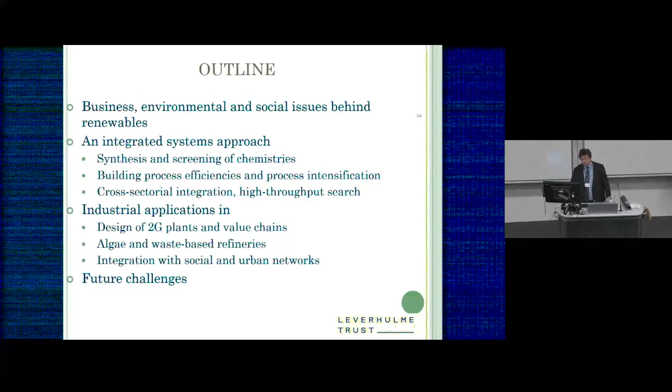I will touch on the major drivers of renewables and biorenewables, and try to explain why a systems or integrated approach is important. I use lots of mathematical methods, modeling, and optimization, but during this presentation I will try to ground that through actual applications and problems. I will naturally finish with my views on future directions in this area.

So whether the war in Ukraine will continue, whether we find new reserves for oil and gas, whether the price of oil goes up or down, we need to keep the planet alive, have a more balanced portfolio of resources, and apparently increased uptake of renewables.

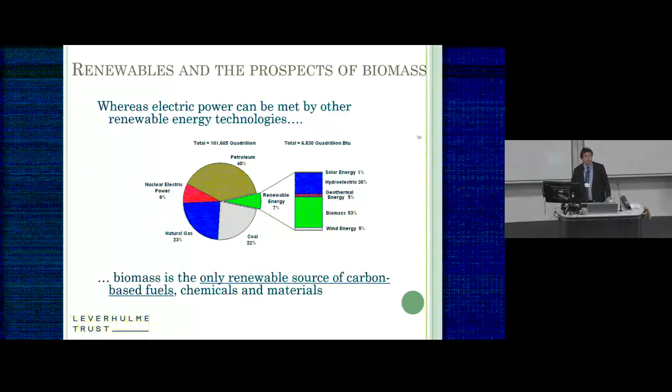And out of the renewables, the largest portion, also historically, is biomass. More than 50% of the renewables are based on biomass. And biomass is the only carbon-based renewable that we have.

Biorenewables have a first round of developments with first-generation plants. These were based on simple chemistries, single products, easy kind of chemistries. We have several plants - green plants, profitable plants - still that are unsustainable as they compete with food.

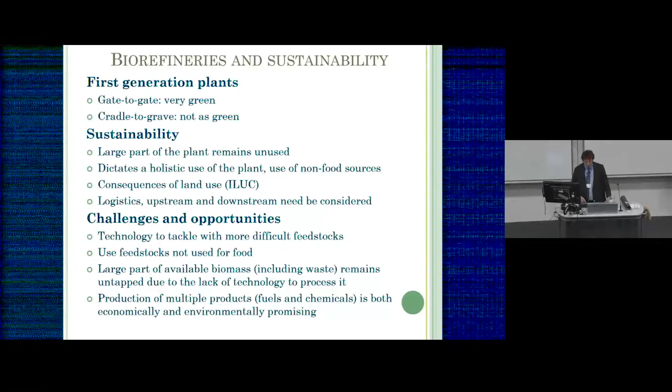They are more with gate-to-gate efficiency rather than cradle-to-grave type of efficiency. So the future would be on the more difficult type of biomass, which involves more difficult and complex reactions, which involves a full and not such wasteful utilization of resources. So the chemistries are quite complex in this case. You can get a feeling of what it is there.

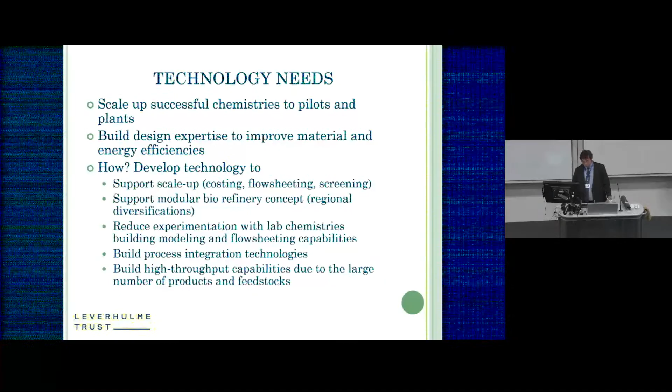And what this kind of technology will need from us? Apparently, we need to make sure that they're sustainable, we can scale them up, and we can connect them with sustainable portfolio of other chemicals to survive. And what is the role of chemical engineering or process engineering?

Apparently, chemical engineering holds the knowledge, and also, if you wish, the historical expertise of the conventional refinery. Conventional refineries also started with very simple, actually, with no chemistries, and they developed into complex kinds of systems with complex chemistries and very efficient process. Essentially, every drop of oil that goes into the refinery becomes something.

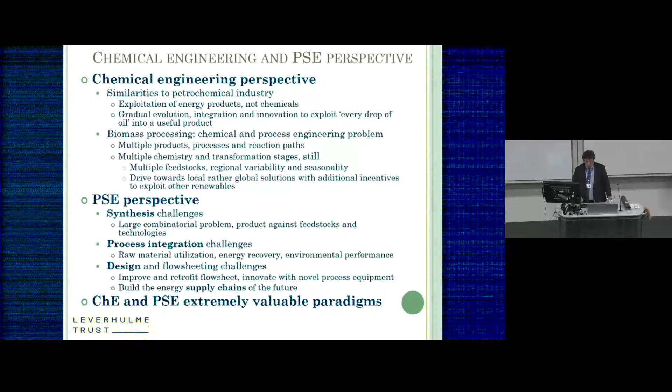Unlike that, the biomass, as we will see, biorefinery developments, are very low in efficiency. So process systems engineering can be very helpful with the synthesis technologies to screen the chemistries, with process integration to build efficiencies, and with modeling to be able to analyze, scale up, and design.

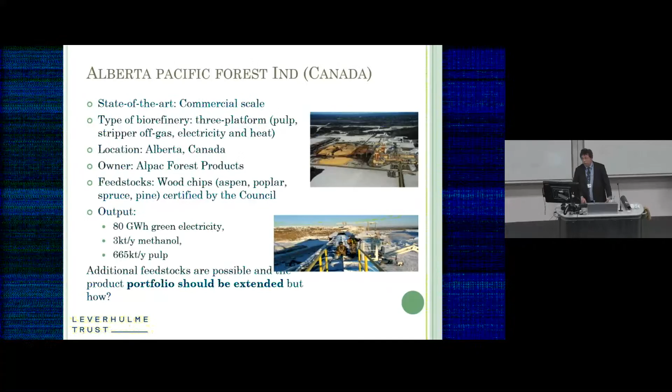So many other developments in France and Norway, around the world, you can name it. Some of them will survive, some of them will fail. So one usual typical question that comes out of that is, what is the state of that? How mature, how ready we are exactly, with this?

You know, it can process lots of different kinds of feedstocks. Yeah, its mid-gut is also very well developed. And what you need to figure out and complete is the hindgut.

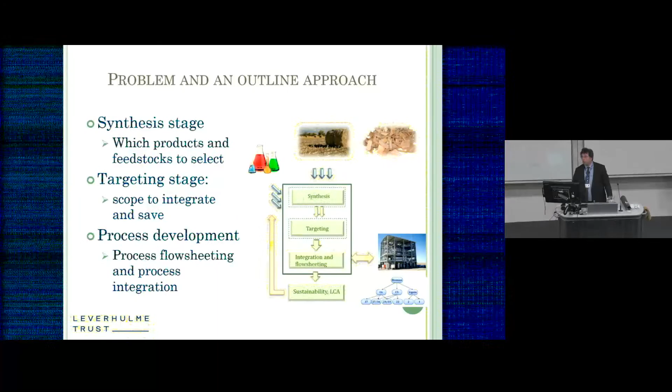So in process systems engineering parlance, this looks like a block diagram where you start from the bottom. You have some chemistry that you want to evaluate, and then you want to assess it on environmental and economic criteria, and then connect it to a portfolio of other chemicals that will make full holistic utilization of biomass and, of course, build energy and process efficiency.

So we start from the bottom. And the modeling part has been the first kind of challenge. And over there, it took us quite a time and quite a lot of interactions with the people because the conventional models and the properties were unprepared to cope with a specific process.

Overall, I have to mention that this is a very challenging area for AI and data technologies because you have non-conventional substrates, deviations from thermodynamic properties, and a lot of opportunities for data embedding type applications. In the course of the integration, we have been able to save an unprecedented amount of 80% from what it was initially. This is uncharacteristic if you compare it with petroleum applications.

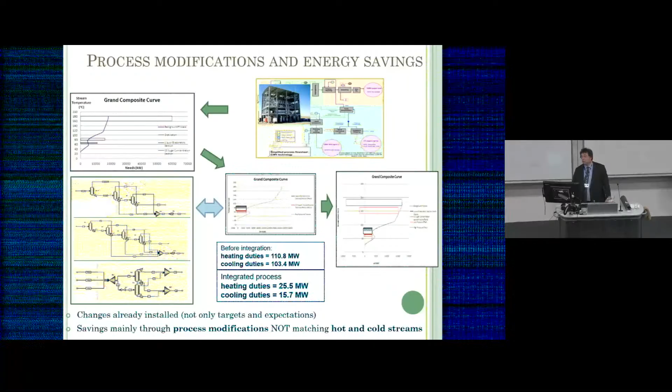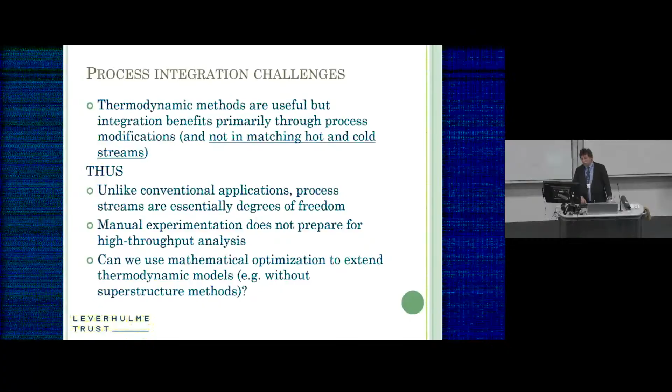But we also realized that the old graphical methods and thermodynamic methods as applied in the past have not had a chance without mathematical optimization type applications, because unlike these older developments, you have to experiment quite a lot, repeating this kind of exercise for so many scenarios.

So here we want to integrate, for instance, a separation, and the solution of this kind of integration would be this four-compartment type of distillation that would not be possible unless with a mathematical approach.

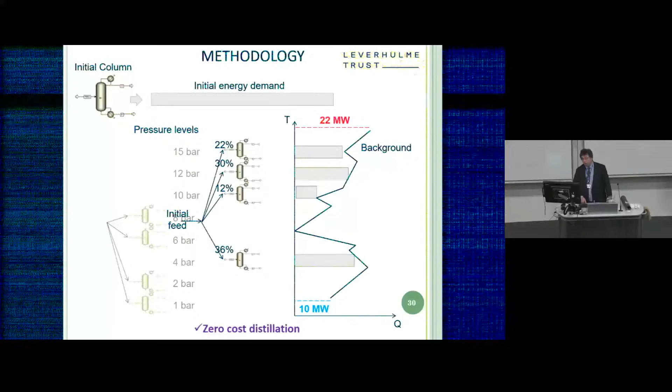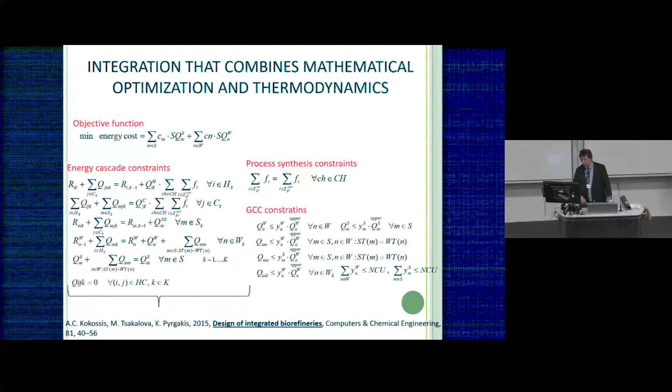So mathematical models, as we saw here, the grand composite constraints which are shown had to be added so that you optimize. This has been applied in a real process to identify the two pockets where integration was appropriate.

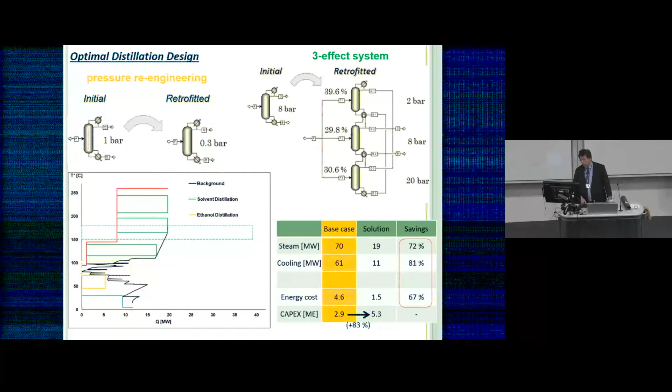Another application, much larger, 70 megawatts of energy, had to integrate against the background of the biorefinery. Here we had to improve or increase the degrees of freedom, and as you see, we have found ways to almost completely find the energy required out of the background process.

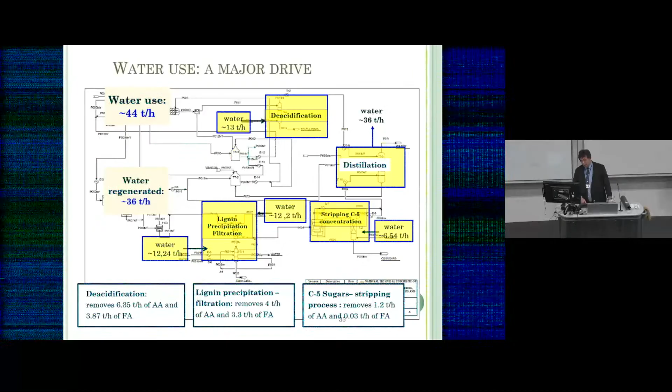Similar kind of work for water integration. Here you see the yellow boxes standing for the water users in this particular case. In this water integration, we had to reformulate quite substantially the conventional models.

We had to increase the number of integer variables, and then we had to use cutting plane approximations to come up with targets for use and regeneration that gave us a starting point for the network that you see here.

But the exciting part comes when you have to consider the portfolios of different options. And of course there, you have to use a more conceptual type of version of the models that you have.

The conventional value chain presentation was not sufficient to account for the modularity that we wanted, and also for the opportunities to integrate across different value chains.

So we had to use Petri nets to translate these value chains into a graph that was next developed into a superstructure.

This superstructure, for instance, can be used to identify what kind of feedstocks are appropriate for a particular product, in this case propylene glycol, or in case you have one product in mind, like acetone, identify what kind of co-products you should be using.

And because of the relative simplicity of the model, you can include logistics as well. Going back to the original problem in Organosolv, we have used this kind of technology to screen for a number of different products that you could produce.

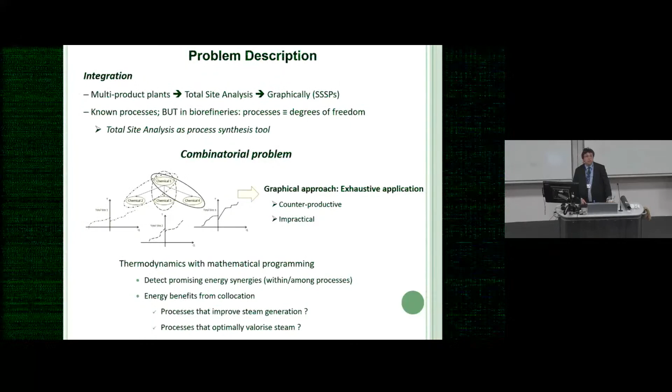Total site integration has also been studied in the past, but again with fixed flow rates. Here in our case, all flow rates are variables, so we had to completely reformulate what was done in the past.

So we find a superset of cascades that we have to integrate so they can allow for site-to-site integration, as well as integration within the process, as well as the use of utility.

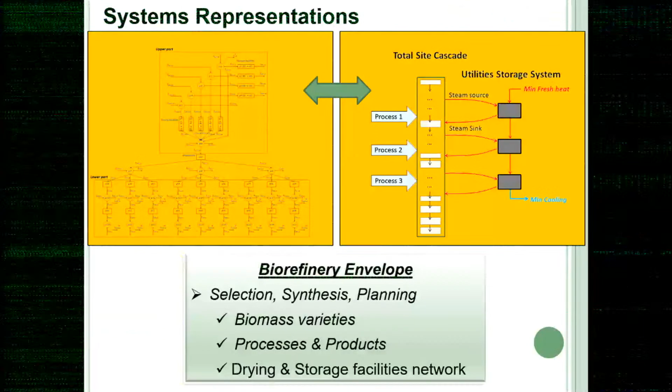So this has been the first part, and the second part has been the balances from the graph that I was showing before. You have basically two components: one that accounts for the energy, one that accounts for the graph, and you can use this one. These kinds of formulations are shown here.

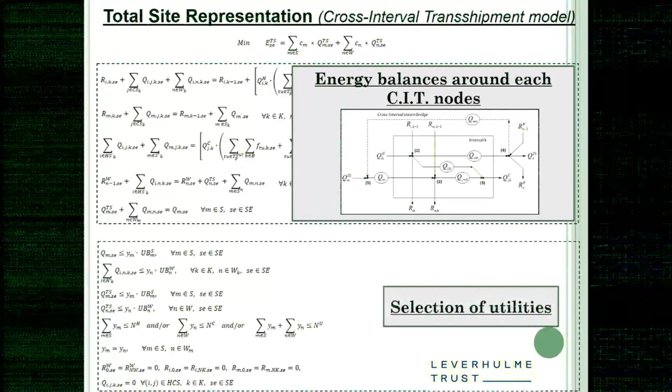I don't expect you to be able to review what it is there, but basically an idea of what it is: this is the energy part, this is the mass balance part.

You can use this kind of technique to identify, of the reduced value chain, which ones integrate for the better value, so you can identify what are the portfolio products in this particular case. And because you don't believe that the model is fully accurate, you're going to have different integer cuts and identify a set of promising products that will come out of that.

Now this approach has been extended to account for scheduling. In this case, you see 6 varieties of feedstocks and 21 types of process. We have included time in the variables in the formulation, and extended the approach so that it can give us the plan and the schedule for the production.

This is from a real case in Hungary. You can also use integration to account for the energy required for pre-treating biomass from one batch to the other—here again we have different batches in place. Finally, you can use the formulation to mitigate the intensity of the integration, to have a safer version of what you produce.

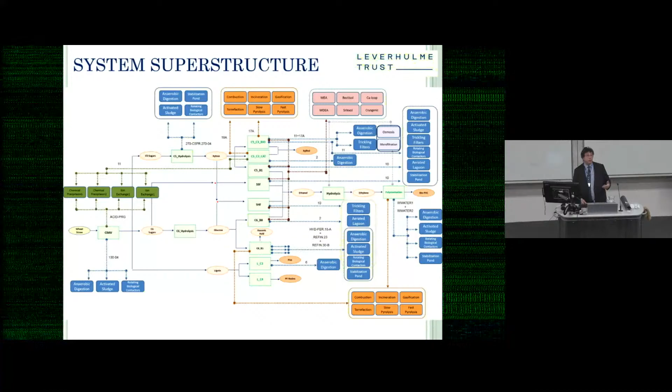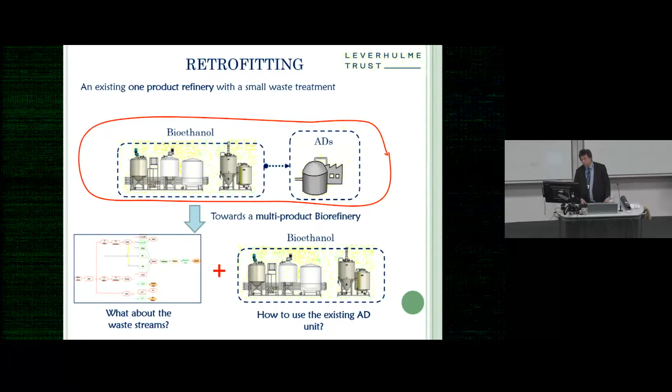What you'd expect: the more products in the value chain, the better the integration you will have. The integration has also been extended to account for the valorization of waste. We take our results and extend them with a superstructure that accounts for different options for waste management. This analysis gave us, for unrestricted cases, the minimum cost; for a reasonable number of waste treatment processes, a much higher cost. In the case where we involved even basic types of valorization, like anaerobic digestion, we turned this kind of cost into profits.

We are claiming that this is a systems approach, so it has generic features. As we go to other applications, it will work in a similar way. So let me quickly illustrate another one, on algae.

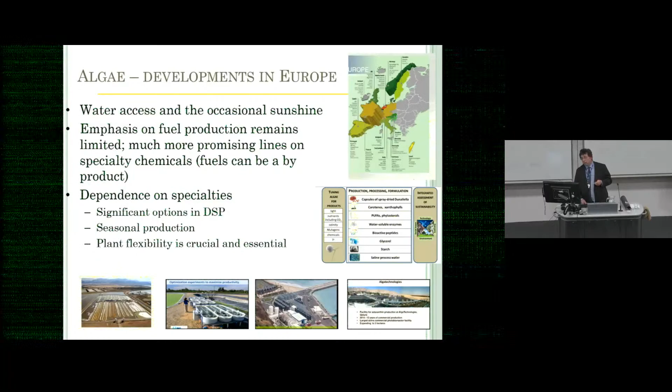Here our pilot is more a Dunaliella factory that produces a number of products, grown in open ponds in salt water. The kind of value chains here include carotenoids, lipids, carbohydrates, and proteins. We have to identify, again in a similar way to what we were doing before, the 4-stage approach—the 4 main stages in this algal biorefinery that include cultivation, harvesting, fraction extraction, and product recovery.

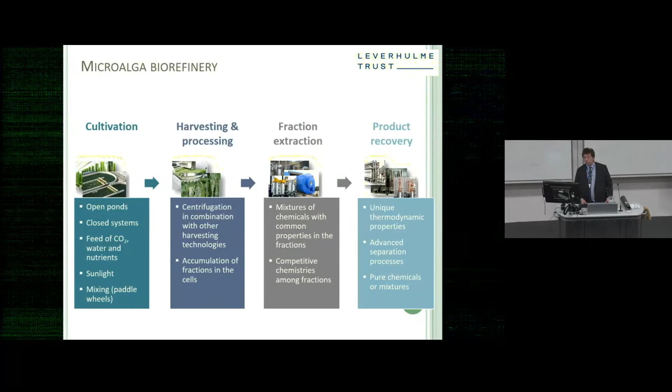But before I go into the systems approach, let me go with the more conventional, more logical evolutionary approach—as this algal biorefinery actually historically developed in Israel. Let's start by targeting glycerol as one of the products; this is more or less the flows you need to integrate, and these are the different parts. As you will see, economically this is an unsustainable kind of process.

Okay, then you say, let us include now carotenoids as a second product. So then I have to change my reactor, change my solvent, change my extraction processes, and as you will see, I have evolved into a completely different type of layout. The good news is you have made an unsustainable process profitable, but the other piece of information is that you have completely changed the process. And if you continue adding products, it's interesting that the flow sheet changes completely once again.

So if you wish, the evolutionary approach is a good way to spend money, as this is not something that will have any flexibility built into it. The systems approach works differently, as we said—we have the 4 stages that I explained before.

Here we have options for different processes and different products. As we bring all these different options together in the form of a super task or a superstructure, we can optimize for different options and get some sort of target curve for the different performance. But other than the target curve, we also identify interesting or promising blocks for the processes we need to involve, and also different promising blocks of portfolios that we need to involve.

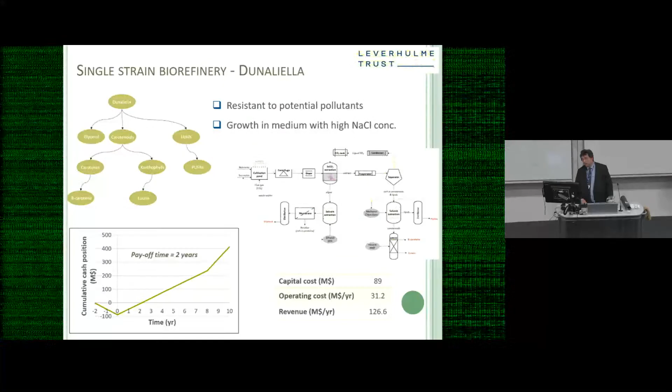For the second one as well, Haematococcus. For the third one, Nannochloropsis as well.

And then out of that, we come up with the 3 value chains. As I said, we will concatenate these value chains into a single one, and this is the single one. And then we have a set of units that we can integrate against this new concatenated value chain.

And as we do that, we see that the flexible biorefinery is, of course, more expensive than each one of the individual biorefineries, but it's also almost 20-25% more expensive than the Nannochloropsis, and accounts for 2 other algae as well.

Now, in the context of symbiosis and circular economy, one has to involve social, urban, and municipal flows that we have neglected so far. So far I was presenting results, again neglecting these flows.

As these flows are incorporated, then the supply chain, again, may reformulate into something completely different. But importantly, if you have multiple stakeholders, and actors, especially social actors, the problem becomes pretty complex.

In this case, we use game theory as a basis, if you wish, to understand the role of the stakeholders, and more particularly address non-profit related criteria like threats, opportunities, stabilities. Also, I would say, identify the correct nature of win-win type of scenarios, rather than wrongfully using, in my view, the Pareto analysis, as this is very popular in the literature.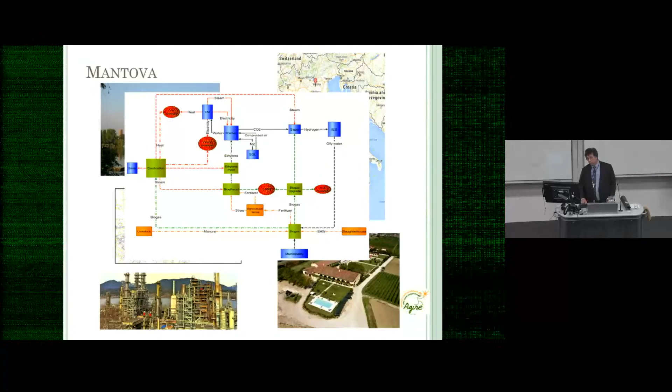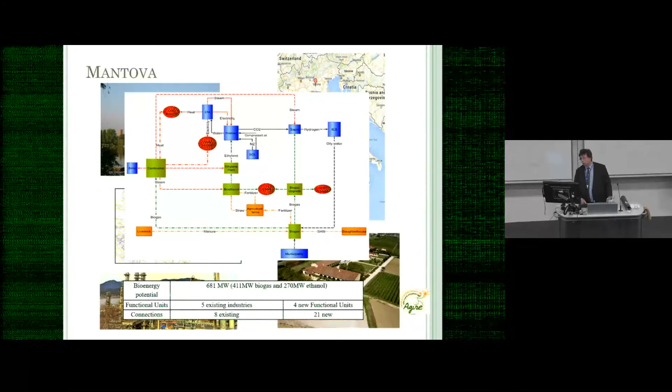Mantova, it's not exactly a port, it's a river port, but it's connecting with Venice, where bioenergy came up to the impressive 700 megawatts, and this actually is already lined up for a biorefinery in the place.

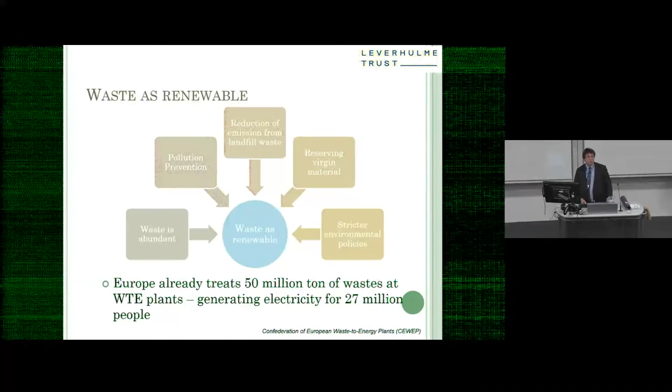So far also I was showing biomass, the high quality biomass. But there is so much biomass which is cheaper and actually with a negative value. So here I just give you a feeling of what it is in plastics, where you have about 800 million tons of plastics from fossil-based feedstocks.

1/3 of them goes to the ocean, the other 1/3 goes to incineration, the other 1/3 goes to landfilling. Only about 5% is actually recycled. Most of that, all of that, is organic.

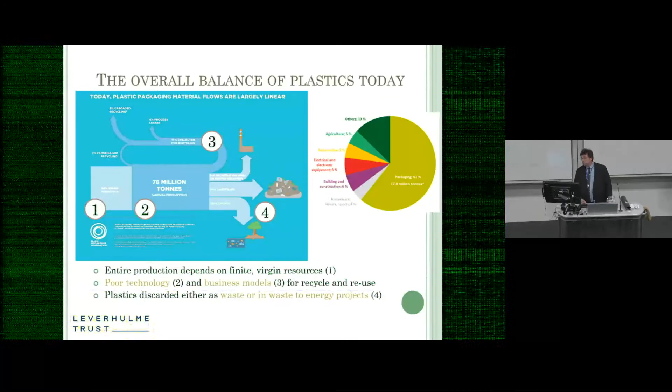So a more realistic or sustainable picture would be with large chemical recycling streams, reuse streams, and replacing a good amount of feedstocks with renewable feedstocks. The largest waste streams are shown here, and significant part of that is textile waste.

So textile waste has been the next project I was showing. Over here, the platforms include wool, polyesters, polyamides.

And the value chain is quite complex, but the value chain that we have figured out in this particular project is a smaller version of that.

The blend fibers have been more than 50%. So the first bottleneck of the systems approach has been to identify the bottleneck. As again, this large amount of blend fibers didn't work out with the sorting of the pure material.

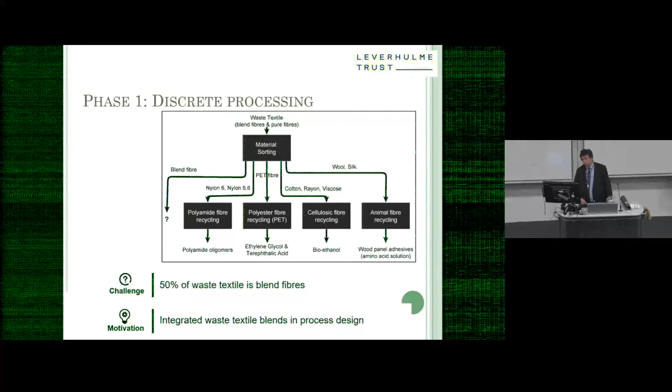So we had to integrate this stream in a cross flow with the pure sorting facilities for the other textiles. The second bottleneck has been the removal of color.

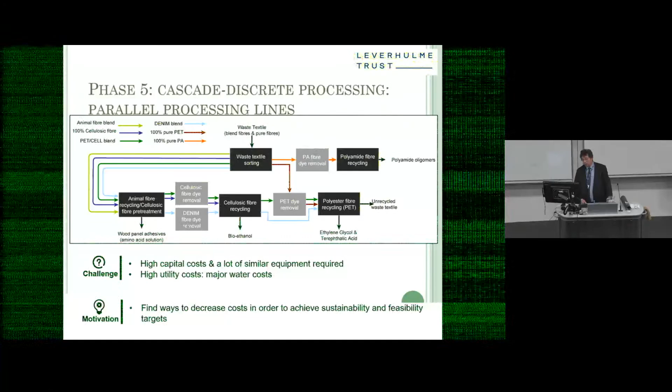So we had distributed decolorization to different sections, shown here. And in the final stage, we had to bypass streams that do not require decolorization, to improve capacity. Then process and energy integration, then final design.

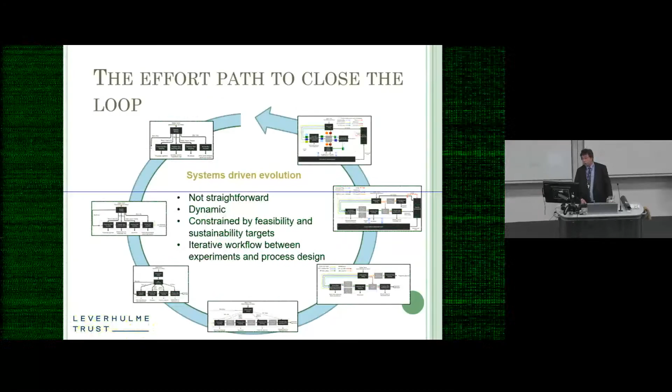So overall, it took 4 years actually to evolve, in more than what I saw as iterations, into something which was a final design. And this is where the circular economy starts.

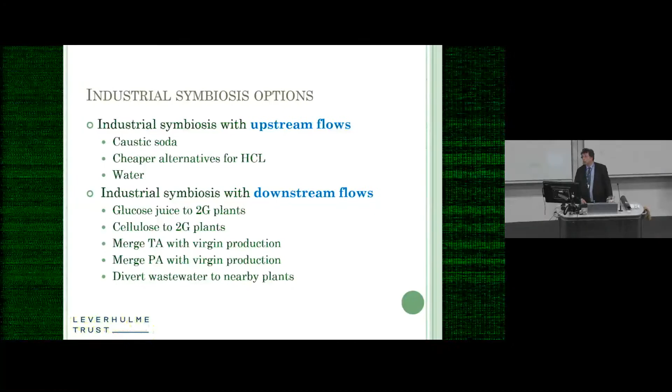Because the next step, we try to identify replacements for the virgin feedstocks with other kinds of more dilute versions of materials, both solvents and chemicals. And downstream, identify which byproducts, which had a value but very small capacity, could be sold to other partners rather than being processed to end products.

So this is the upstream flows. These are the downstream flows, and more of the downstream flows. And the summary of the results: we start with a very negative economic potential, to come up with something marginally, but something positive in the end.

Now, biorenewables are not on their own, so they have to play with other types of renewables. For example, all these renewables, especially those that produce hydrogen, and the CO2 capture units. The CO2 value chains are very much known to you, with different levels of maturity. Methanol and BTX are very mature, other products are less mature.

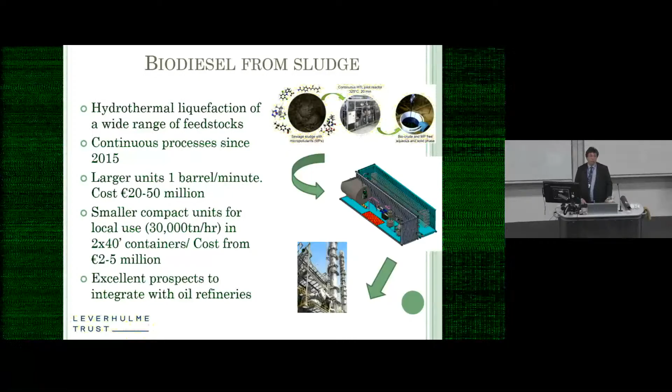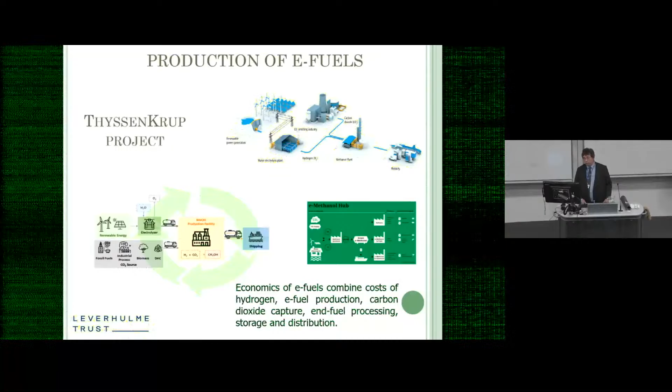The integration of all this is most prominent with the production of e-fuels. So I show pictures from the ThyssenKrupp project, in various types of scenarios, as I show here.

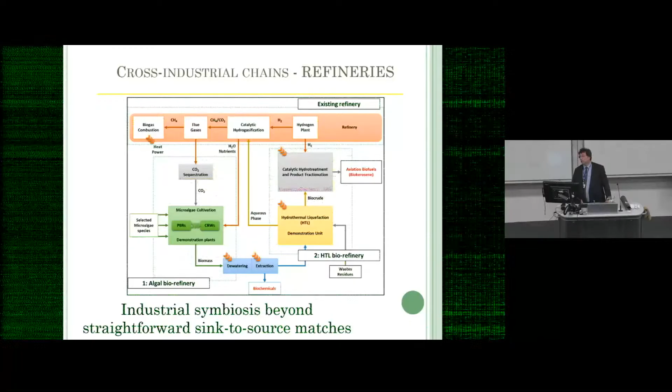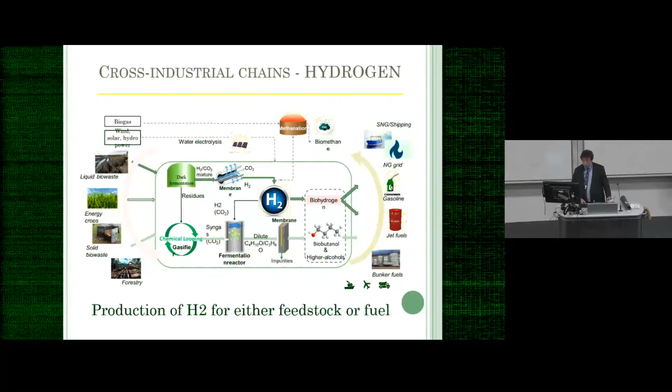So this kind of scenario, for instance, could integrate in terms of CO2. This kind of scenario could integrate in terms of hydrogen, where dark fermentation or pyrolysis could produce hydrogen mixtures with CO2, that could be either locally used as feedstock or integrated with gasification streams into more dense liquids, like liquids that we use for different purposes.

We are very fortunate that these developments come very close with advances in data technologies, because the speed and the efficiency of what we do would be much lower otherwise.

So data engineering and applications can apparently automate several of our experiments, but also help us support new innovative or emerging types of processes that we have to deal with. Either when we have lots of data with deep learning kind of methods, or when we have complex models to scale them down into something more practical to use, or much more in the case of data embedding, correcting physical models.

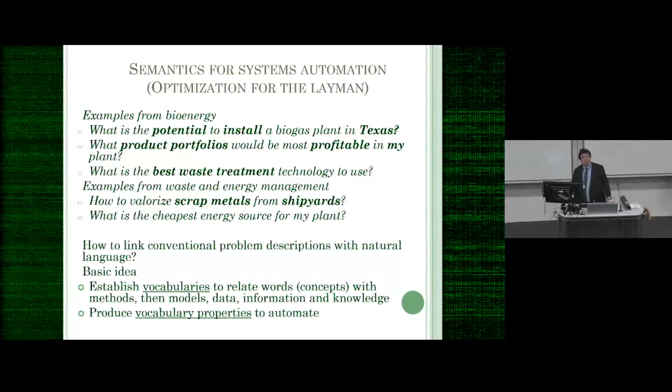So I will start with one application that is bearing roots in semantics and ontology engineering. Basically, this is an approach to translate—it's like a natural language kind of application—translating queries in English into optimization. It's in the spirit of something similar to Pyomo, that is used at Carnegie Mellon University quite extensively.

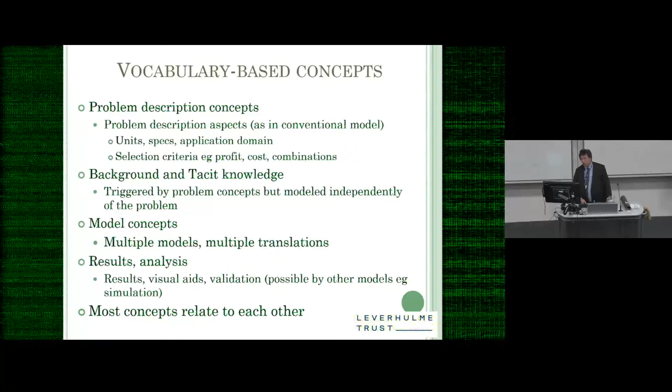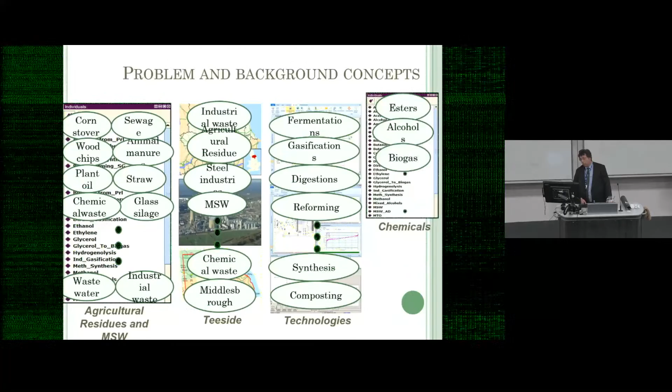So the idea is that you develop some sort of vocabulary for terms—feedstocks, process, products, also in terms of objectives, profits, whatever cost. And then out of this vocabulary, you create queries. Queries are connected to databases that collect what kind of concepts are related to this particular query. So these are databases of concepts and databases of numerical data.

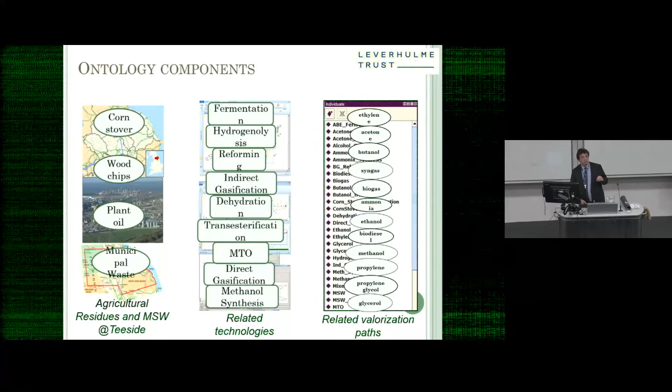So once you do that, you identify what components are relevant to your query. And remember that we have a data representation in terms of ontologies, so all these entities have properties—they know about connections and relations with other ones. So they can develop automatically paths.

So for instance, we start with corn stover, then we know that you can ferment it, then we know that you can produce ethanol, then we know that you can possibly dehydrate it, then we know that you can possibly produce ethylene.

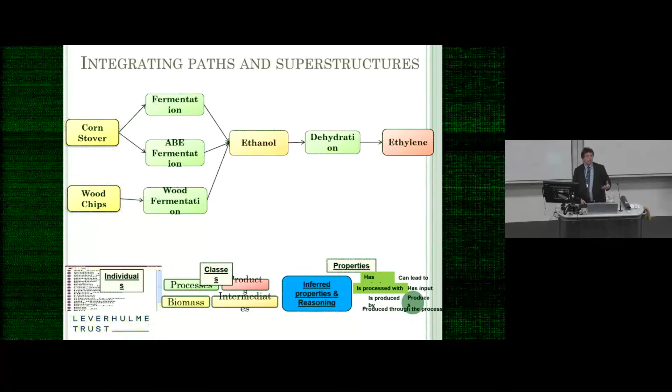You can do that automatically, or the system can do that for you, for all the different processes, and then concatenate all these things into one superstructure. You can generate all these things automatically in the background, here and there. Once you have that, you can develop code automatically using, say, Java—creating, in our case, GAMS code that would develop the models to run the problem for you. So this is how you create this thing.

I have this thing which may be able to play. Let's see—yeah, it's not a big deal, but it more or less shows what you actually do.

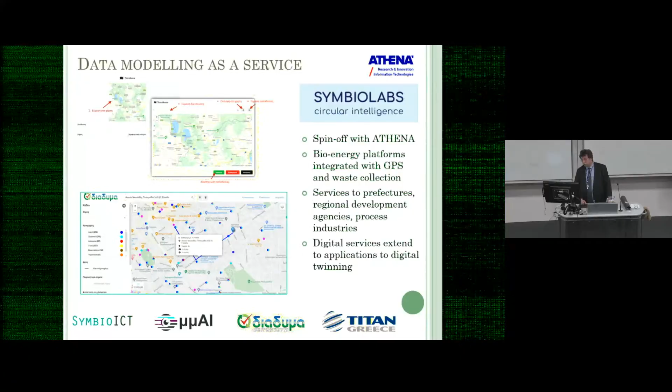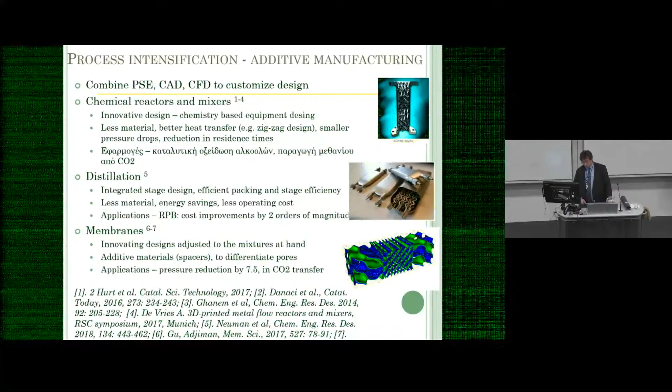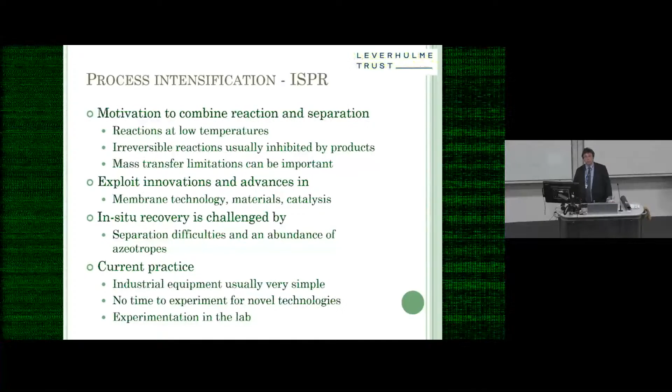The digital twinning process intensification is a different type of problem. Here you have novel processes which are complex to analyze and simulate. So data technology can help you come up with more reduced versions of these models, and you can also integrate them into flow sheets. This is, for instance, a case for in situ product recovery systems, or systems that combine reaction and separation as a single unit.

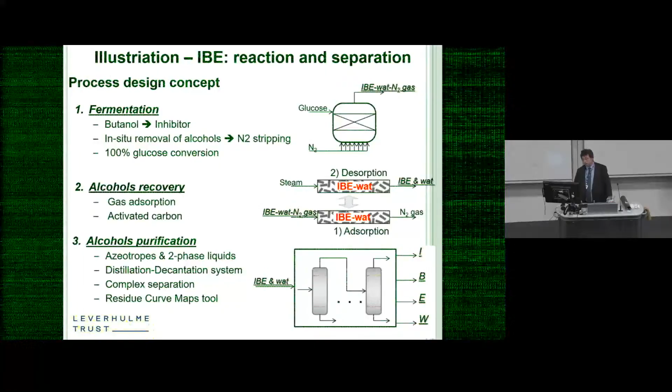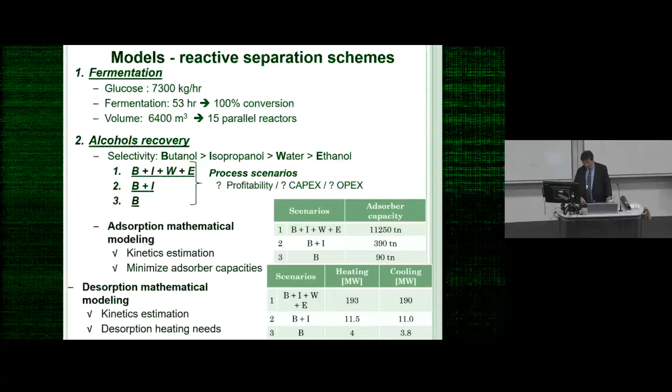This is very efficient for biochemical and thermochemical reactions. I always show the illustration of IBE, which is isopropanol, butanol, ethanol. Reaction on its own has very low yields, whereas reaction with separation can improve the yields quite a lot, and you have many options for separation—a long list you can select from. You can go almost to 100% conversion with these techniques, and build model intelligence that accounts for non-ideal behavior. Finally, you can connect it to flow sheets.

This came from recent applications that we have. An even more exciting application, or list of applications, is related to industrial biotechnology. Most of you are familiar with the work of Frances Arnold and directed evolution. The version of directed evolution in Europe is taking the form of a research infrastructure, this IBISBA research infrastructure, which basically tries to connect strain engineering and design with process design. These are different domains and contexts, very difficult to integrate.

An equation-free type of representation would be a very promising way to let these different worlds interact with each other. A particular challenge here is combining what you'd call an allopoietic system, a physical system, with an autopoietic system, a biological system which adapts on its own. The former obeys some sort of first principles and can be modeled, with data embedded or whatever, in a reasonable way, whereas the biological system is something you need to monitor and understand also in terms of its own structure.

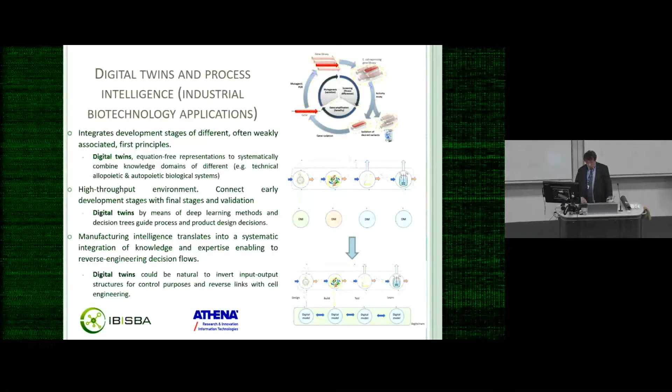Here we show one application in collaboration with EPFL, where we use genome scale models. Genome scale models are not state models—they don't describe states, we're more applying convex analysis. So we use this to identify possible kinetics, and this is from Oracle at EPFL, thermodynamically feasible combinations of this curation.

And then we test stability, and then we come up with a smaller set of data. We do clustering, and out of that we identify possible kinetic models that would match real life kind of data. So this is the big cycle, and this has been, in the middle, in the production of muconic acid.

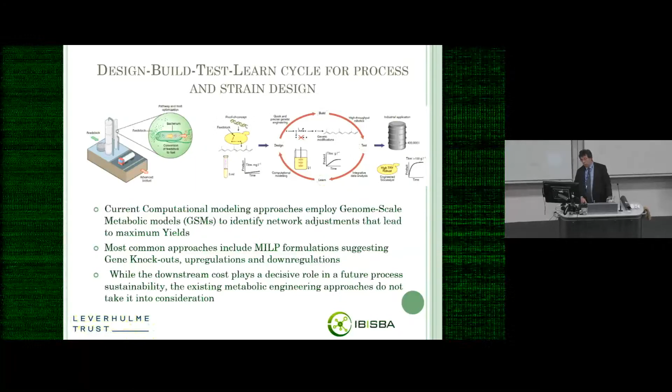We can also apply combined strain and process engineering using mixed integer linear programming type of formulations, where we allow for genes to be degrees of freedom and the type of process equipment to be also degrees of freedom.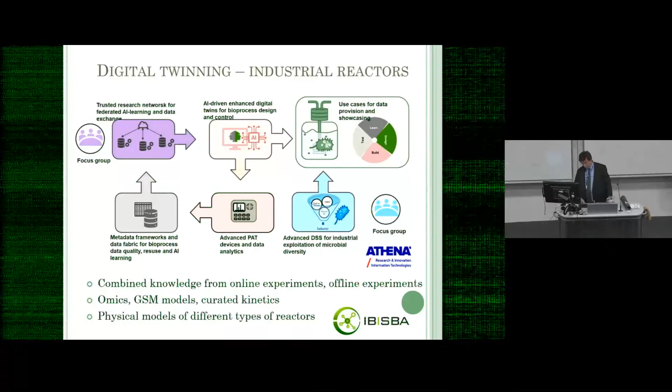A much more ambitious and extensive type of application is underway by IBISBA, where the type of data that we plan to integrate include GSM models, online and offline experiments, as well as different types of physical models. This is pretty ambitious, but it would be a handy service for people who work in industrial biotechnology, because they will have digital twins, in other words replicas of reality, for experimenting and developing their own stuff.

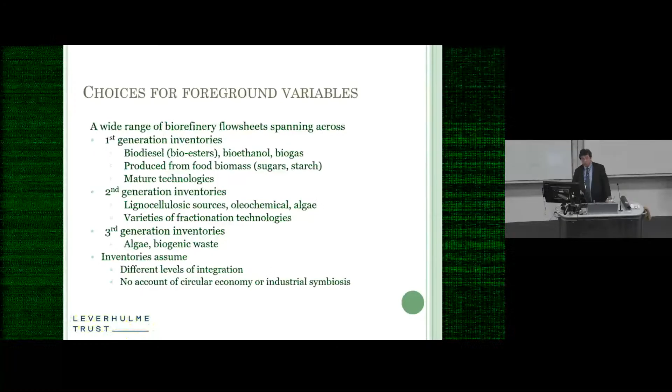This is what we have done using background sets, as I show here. They relate to different types of biorefineries: first generation, but also second and third generation. The outputs are the usual stuff that you see in LCA analysis. We had 3 allocation methods and 2 sets of independent variables.

I will illustrate that with 2 types of developments we had. One has been decision trees, the other has been data models. Decision trees were more or less intended to help us understand what exactly the system was telling us. The data models were more to enhance precision.

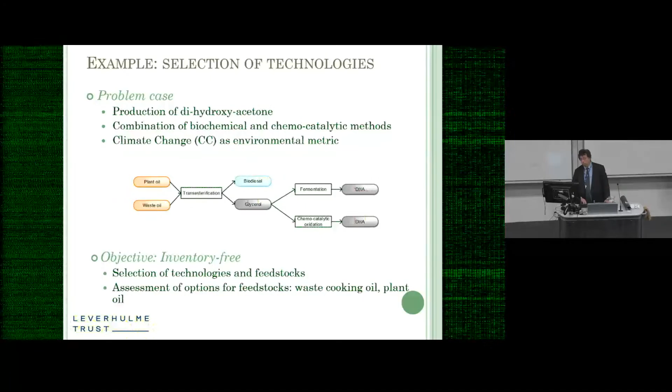Well, the picture has not been that rosy in all other places. Here we have a different type of application: we select technologies. We want to produce a particular product and choose among 4 different technologies. Using the decision trees, we consistently underestimated all the choices, but on a relative basis, we have still done a reasonable job.

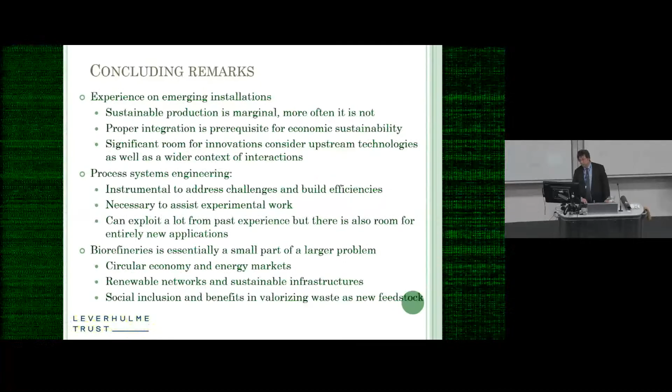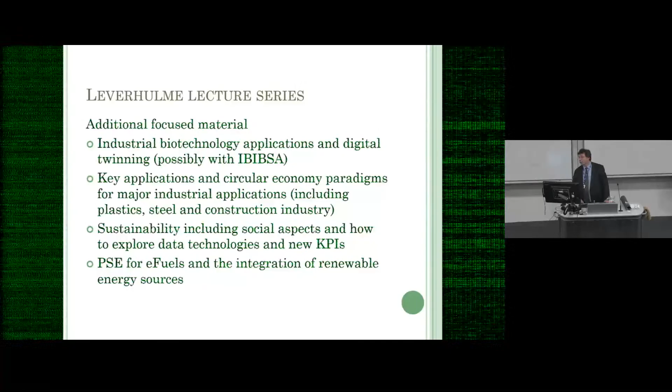You may get rid of me today, but you're not going to get rid of me in the coming weeks, because I'll come up with other talks and more focused material.